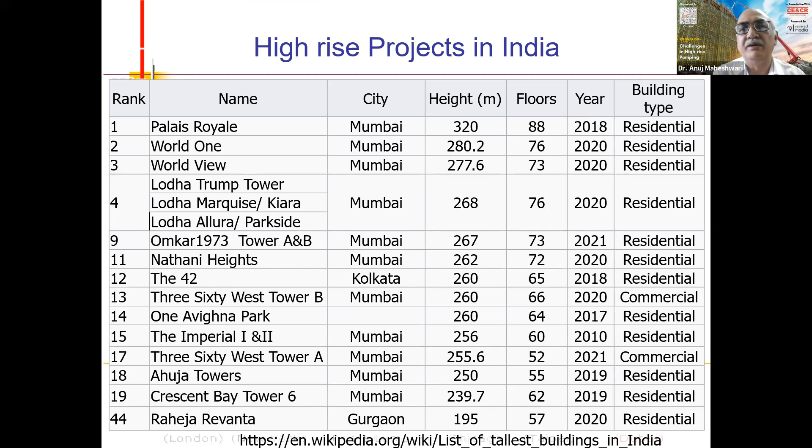Looking at that trend, I think a number of high-rise projects have started coming up in our country as well. Especially in Mumbai, a lot of projects up to 300, 320 meters are already executed - World One at 280 meters height, 76 floors, and so on.

There are also a number of projects under construction. To talk about the highest project under construction, as per Wikipedia details, it is 360 West Tower at Mumbai, 361 meters high, 90 floors. Lokhandwala Minerva at 296, 331 meters, Ocean Towers 1 and 2, and so on.

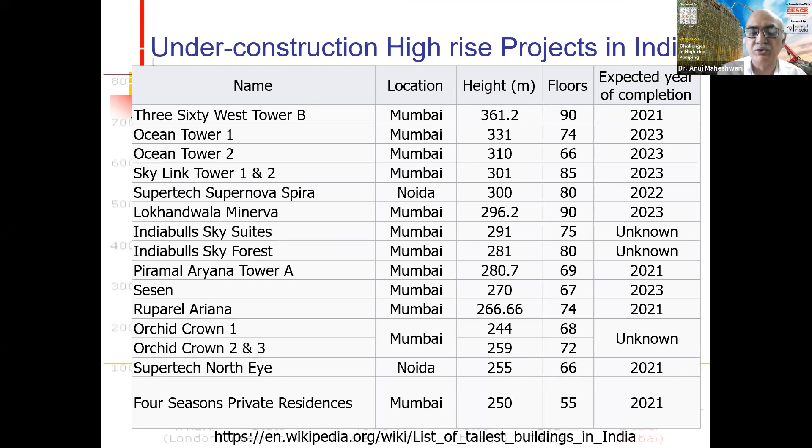So it is time that we should start understanding the concrete basics. And I'm sure if we understand concrete basics properly, handling pumpable concrete is not an issue.

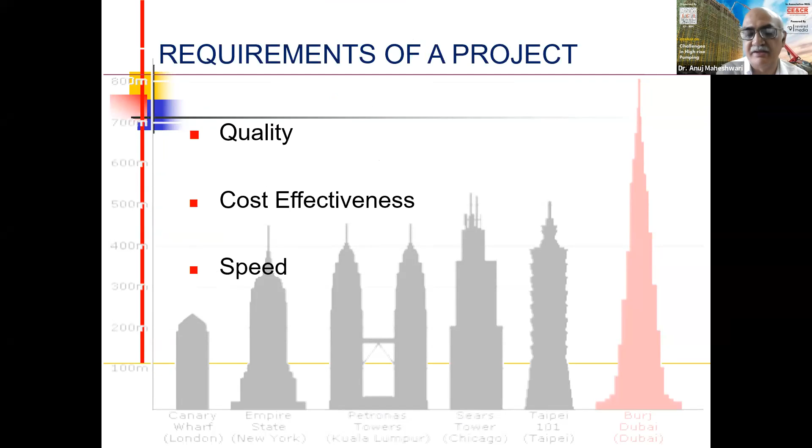As we know, quality, cost effectiveness and speed are the three main pillars that any project looks for. And if we talk about concrete pumping, it addresses all three in a very subtle way. Coming to why we need pumped concrete - some very basic assertions.

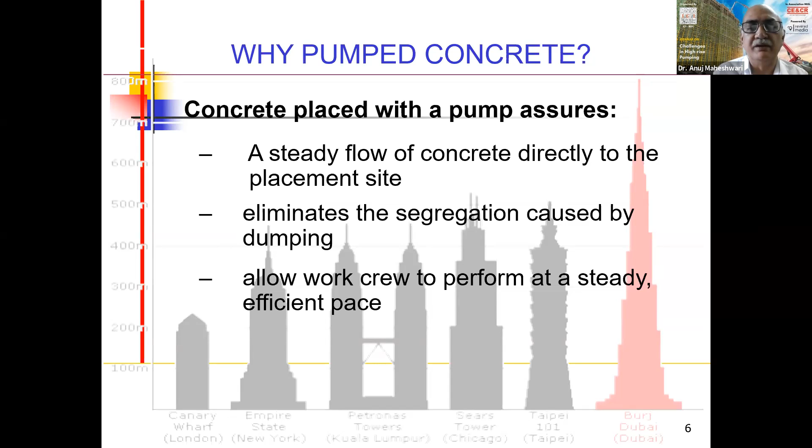Concrete placed with a pump assures a steady flow of concrete directly to the placement site, so we are not handling or rehandling it again and again. It eliminates segregation caused by dumping. It allows the workmen to perform at a steady and efficient pace - we're talking about a 30 cubic meter per hour pour, or 50 cubic meters per hour pour. So the rate of construction becomes tremendously good.

Concrete placed with pumps is economical. It reduces the unloading time of transit mixers, it reduces labor requirements at both ends of the process, and there's no need to shovel or rehandle the concrete.

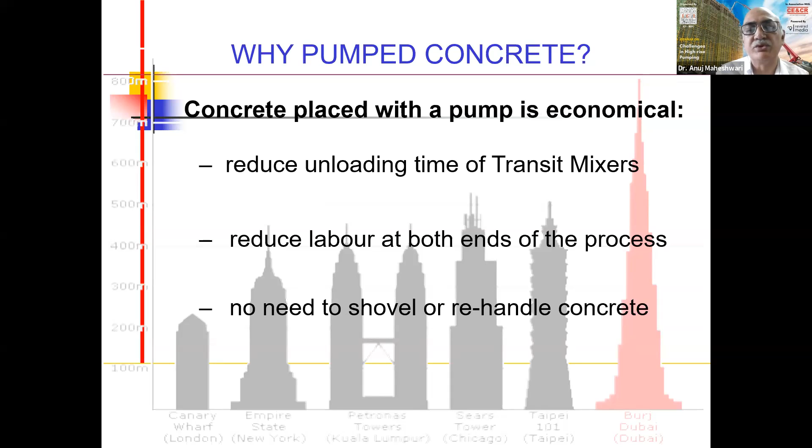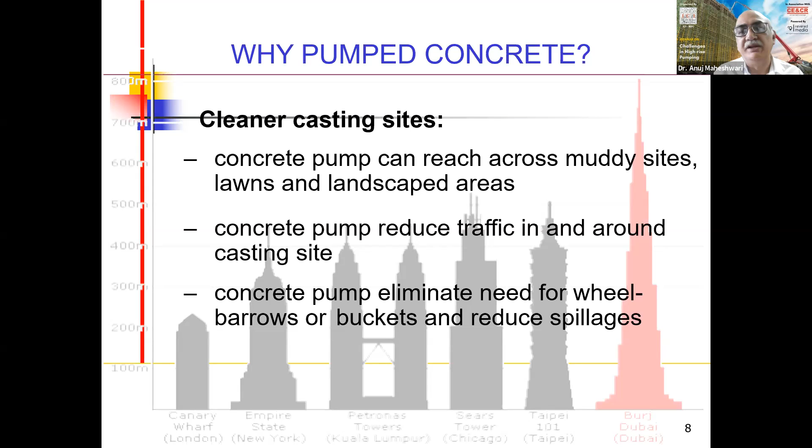We have cleaner sites - concrete pumps can reach across all sorts of landscape areas, muddy sites, lawns. If we add these up, concrete pumping is perhaps the right solution for concrete placement. It reduces traffic in and around casting sites, and eliminates the need for wheelbarrows or buckets, reducing spillages and hence wastage.

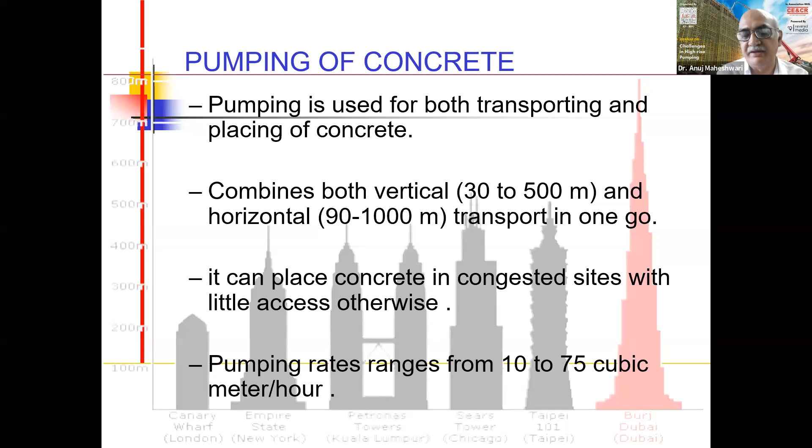Pumping is used for both transportation and placement of concrete, combining vertical placement up to 500, maybe 600 meters at one go, and horizontal placement from 90 meters to 1000 meters. In India we have successfully done over 2 kilometers of horizontal pumping as well. It can place concrete in congested sites with little access otherwise, and pumping rates range from 10 cubic meters per hour to 75 cubic meters per hour.

Coming to the types of pumps, we have different types: piston type pumps, peristaltic pumps or squeeze-crete pumps, and pneumatic placers as well.

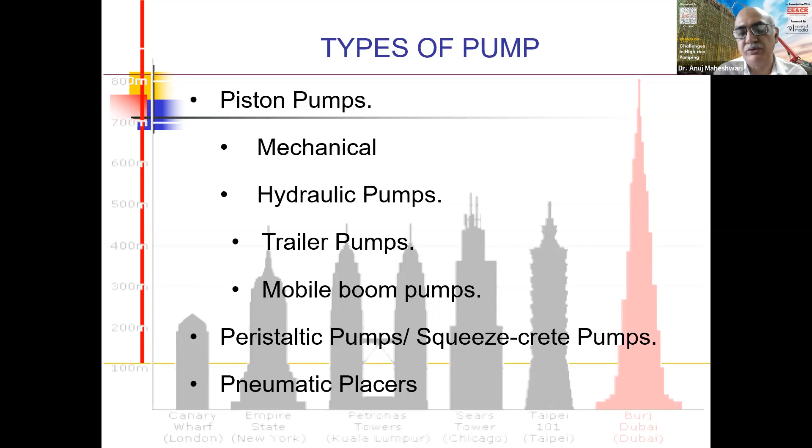Coming to piston pumps, it could be either a mechanical type pump or a hydraulic type pump. Under hydraulic, it can be a trailer mounted pump or a mobile boom pump. Let me walk you through the visuals here.

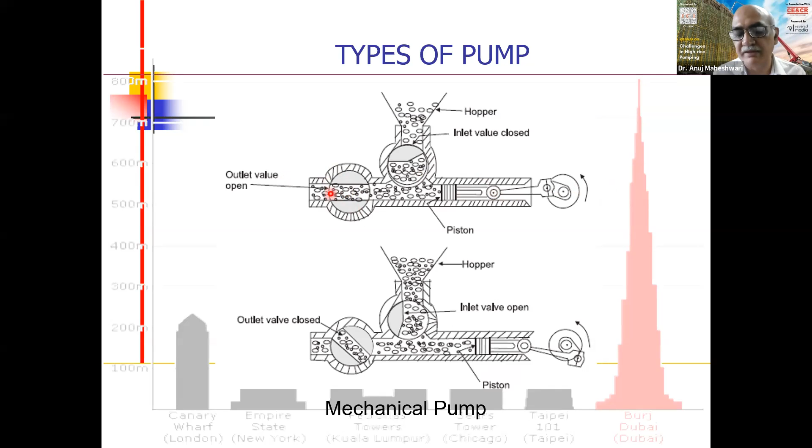This is a typical mechanical pump. We have a piston, and a hopper which is filled with concrete. We have one valve here - when this valve is open, concrete flows by gravity, by weight, into the pipeline, and the piston pushes. When the piston pushes, this gate valve is closed and the gate valve on the pipe is opened up, so the piston pushes the concrete in one stroke. It is a stroke-wise placement of concrete.

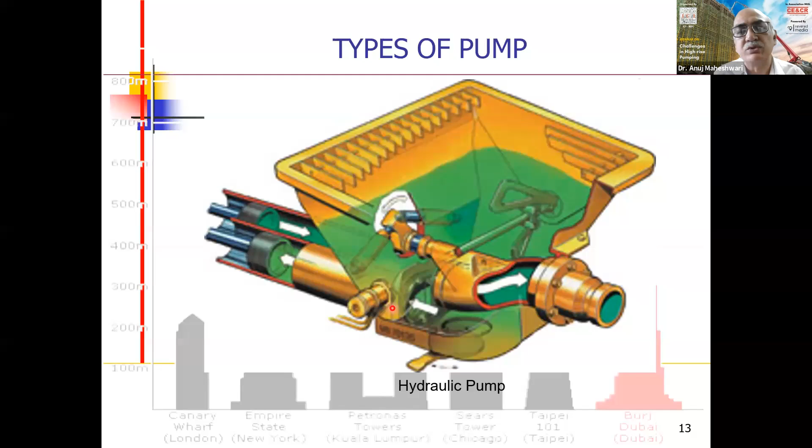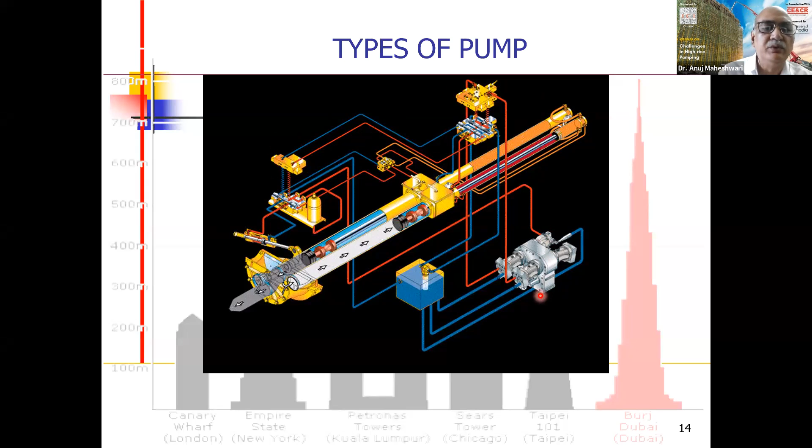Let's say clarify how the concrete is pumped here. So we have a hopper here in between, above this particular region. Concrete is sucked in, just like we suck medicine, injectable IV medicine, in a syringe. So concrete is sucked here in one operation and then pushed in another operation, and this process happens alternatively. This gate valve changes position from one pipe to another in an alternate manner with the help of the hydraulic circuit, which is provided with the pump. So this is a broad working of concrete pumps, and we can have different systems of gate valves here.

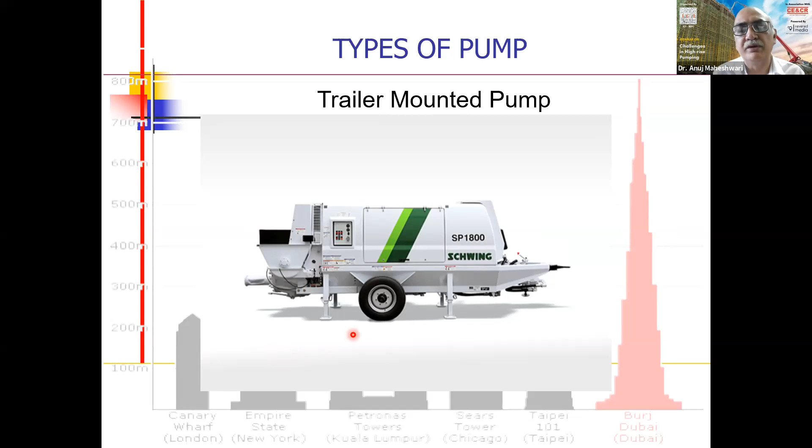This picture shows us a trailer-mounted concrete pump. Here, this concrete pump is towed away to the construction sites with the help of a towing vehicle, and we need to assemble the pipelines, which are 3 meters in size, 125 mm MS pipes, manually with the help of couplers. This takes a lot of time for mobilization of the concrete pump and pipelines at site.

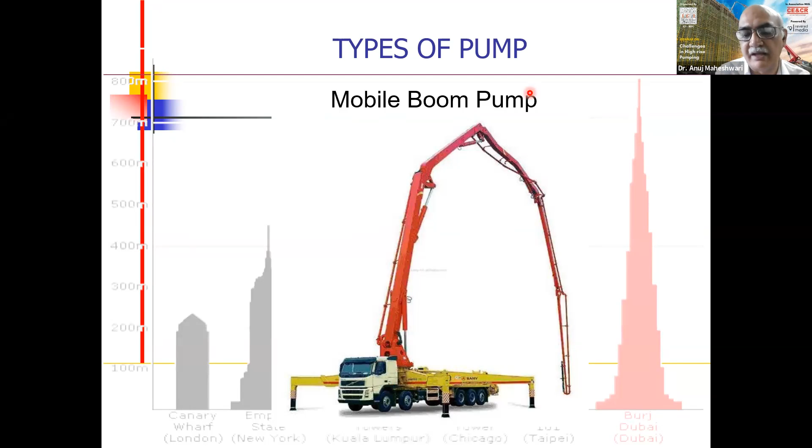Another variant is the mobile concrete boom sort of pump. Here we have this mobile foldable boom along which the pipelines are attached, and the moment this mobile concrete pump reaches site, it settles down, jacks itself up, and concrete transit mixers come and unload concrete in the hopper, and we can start pumping right away. So there is no or lesser mobilization time at site for the concrete mobile boom pumps. The only limitation is that we have a fixed length of concrete booms, so the height of concrete pumping at times becomes a limitation.

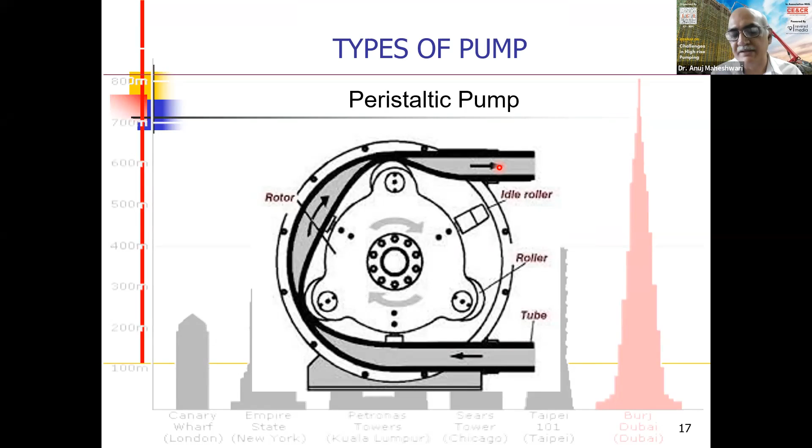Another type of pumps are the peristaltic pumps, also known as squeeze-crete pumps. Here we have a tube, a central rotor, and rollers at different configurations, along with an idler roller. The central rotor moves, and we have a tube which contains the mortar sort of material. While it rotates, it squeezes out the mortar and enables it to be pumped at the required location or position. This process is entirely similar to the way we take out toothpaste from a tube, squeezing it so the paste comes out. These pumps perform in the same process.

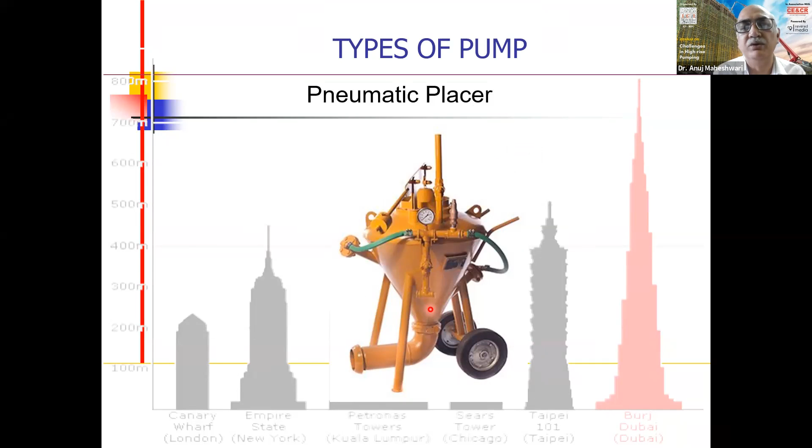Another method of placement is the pneumatic placer. This is a batch process of placement. We fill up this hopper, and then in batches, with the help of pneumatic pressure, we place concrete to the required locations.

Coming to concrete rheology, because till date concrete happens to be a material which was quite stiff and solid, a particulate material, first we look into the comparison between conventionally made concrete and present day concrete. Conventionally, we were having volumetric batching, which calls for more cement. We were doing manual placements, so lesser fines were required, and the workability was adjusted by water, handled by the concrete mixer operator visually.

In present day concrete, since we are following weight batching, we are using different supplementary cementitious materials. Hence, we have very optimized cement contents in our mixes, along with a large amount of supplementary cementitious materials. To place these concretes, we are now following mechanical placements, so we have to work with highly workable mixes, and to handle them we need higher fines. Concrete workability is adjusted by use of chemical admixtures and various other admixtures. So use of mineral admixtures and chemical admixtures are a must when we talk of present day concrete.

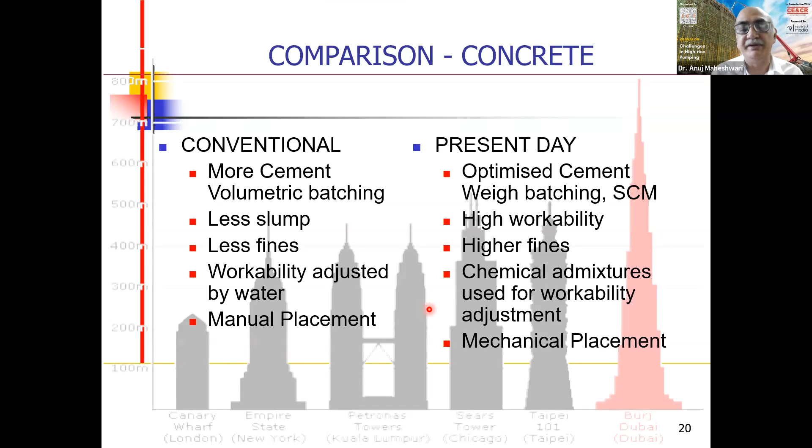And since we are talking of mechanical placement, it could be with respect to placement with the help of a crane and bucket system, or placement with respect to a concrete pump. So we are talking of high flowing concrete. Concrete now is idealized, or modeled, as a fluid, so all the laws that we have studied in our civil engineering curriculum for fluids, in fluid mechanics, apply to concrete as well. I'll not go into the physics or mathematics part of fluid mechanics, just the conceptual part.

Once we are clear with the concepts and important parameters involved while proportioning and pumping concrete, it becomes fun for a concrete engineer to work on pumpable concrete.

We know there are different types of fluids available, and the basic type is known as the Newtonian fluid. If we plot a shear stress versus shear rate graph, it is a linear relationship which passes through the origin. That means the moment we apply a little shear stress on the fluid, there is shearing in the fluid and it moves.

We have different variations. It may be either a shear thinning or shear thickening sort of fluid.

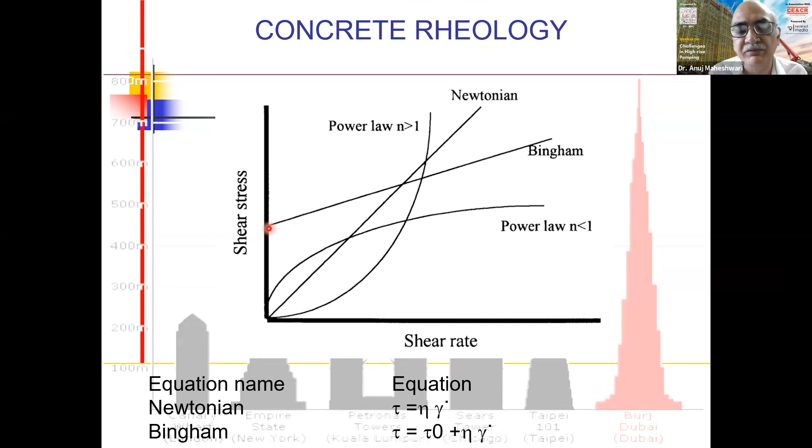It's also important to note the flow pattern. For the Newtonian fluid, we have laminar flow. The velocity profile is such that we have zero velocity at the pipeline end, it increases gradually and reaches maximum at the center of the pipeline, then reduces back to zero at the other end. This is how laminar flow takes place, basically in layers.

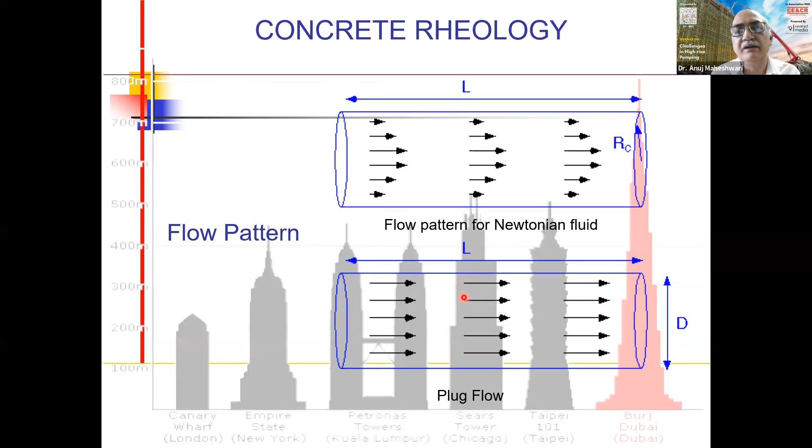There's another sort of flow called plug flow. Here, the velocity distribution remains fairly uniform across the cross section. So the velocity of a particle here, or here, or here is the same under the pressure difference that moves the fluid. At t equals 0, a particle is here; at t plus delta t, it reaches here, and similarly another particle reaches here. So there is no relative displacement between the particles when plug flow takes place.

Coming to pumpability issues, we cannot say concrete is 100% solid or 100% fluid. It is an in-between material. Concrete is also, as we know, a thixotropic material. What is thixotropic? If we leave concrete as it is, it appears to be a solid material. The moment we start applying shear stress to it or remix it, it again attains the fluid form.

We also note that since velocity is zero at the pipeline end and increases to maximum at the average velocity at which concrete is pumped, for the mass of concrete, the velocity profile remains uniform. There is no change in velocity profile like we observe under laminar flow or Newtonian fluids. There is no relative velocity between the aggregate particles for a straight pipe of constant cross section. So whatever set of particles is there at t equals 0, the same set of particles will be found at t plus delta t.

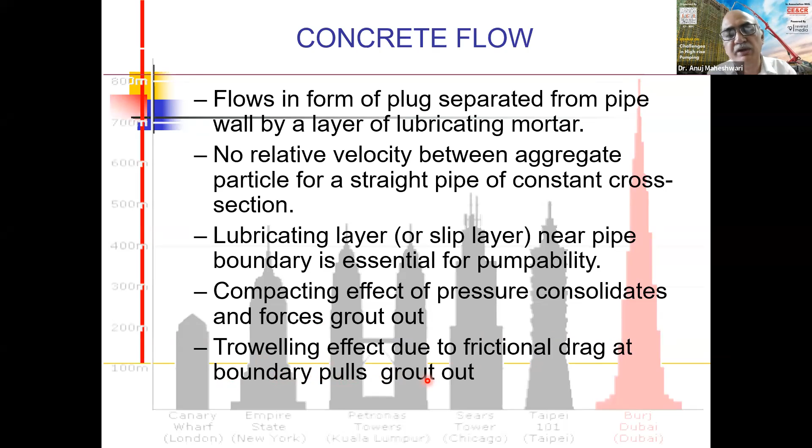Also, the troweling effect due to frictional drag at the pipeline boundary pulls the grout out. So these are the two basic mechanisms by which this mortar or grout is pushed out, and this thin lubricating layer is formed between the mass of concrete and the pipeline. This is the crux of concrete pumping. If we understand it clearly, we can design any sort of mix that can be pumped.

Also very important as a concept: concrete is a particulate material. All the constituents used in manufacturing concrete are particles basically. The coarse aggregate, 20 mm down or 10 mm down, are particles. So different gradations of particles exist. And the basic property of particles is that we have voids in between them, depending on shape, texture, size, and the size ratios we have.

These voids are very important, and they are the main heart of concrete mix design. So the whole concept of proportioning concrete is how we can reduce voids in the aggregate system, how we can reduce voids in the cementitious system, how we can design the paste when talking of high performance concrete, how much paste volume should be there. These are the basic concepts we talk about when proportioning concrete mixes.

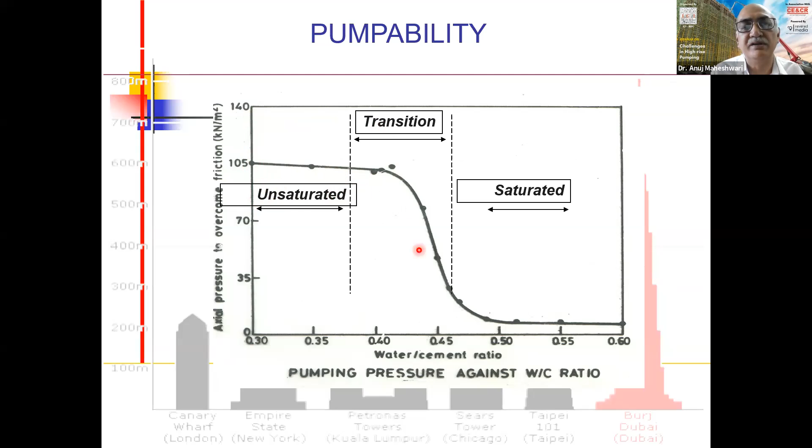So when concrete is in an unsaturated state, the frictional force is quite high and a lot of pressure is required for pumping. Perhaps concrete cannot be pumped at this stage. There's a transition stage, and when the concrete becomes saturated, this pressure drops suddenly, and concrete can be pumped very easily at much lesser pressure. You can see that around 20 kilonewtons per meter square we can pump, as against, let's say, 105 if the concrete is in the unsaturated stage up to the transition point.

So the saturation of concrete is a very important concept. Number two, when concrete is in a saturated state, the radial and axial pressures are the same. A lot of studies have concluded that the radial and axial pressures are the same, and fines content is important in this type of mix. Also, too much cohesiveness due to excess cement and fines may prevent formation of the lubricating layer.

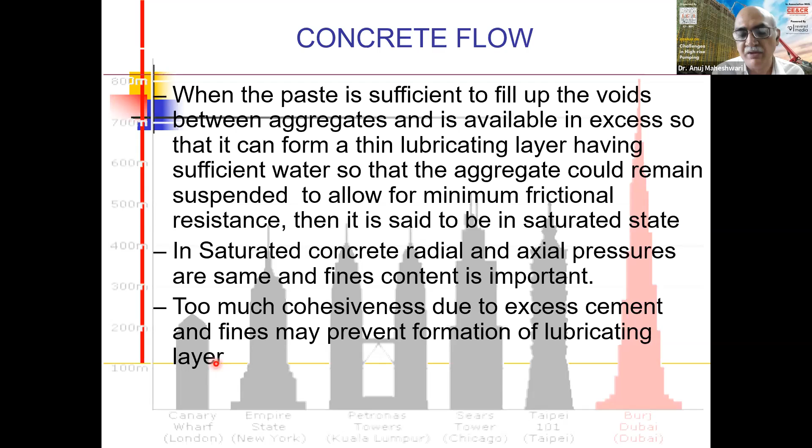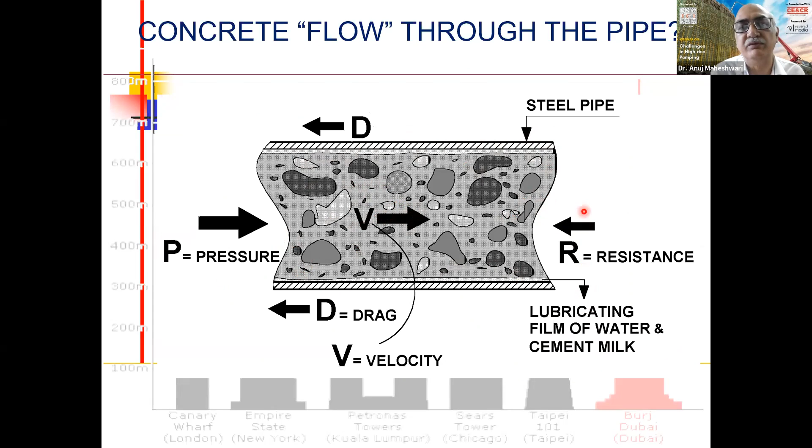What is important is that when we talk of idealization of concrete flow in the pipeline—this is a steel pipe, MS pipe—we have a thin lubricating film of water and cement milk. It is under pressure, so there is resistance from the opposite side. Concrete as a whole moves with velocity v, so we have resistance and drag forces here. This is the basic physics.

Another important concept: suppose we have a bath of water with three different specimens—one wooden, one stone, and one steel. Since the specific gravity of wood is less than that of water, the wooden specimen floats, while the other two, being heavier, drown and rest at the bottom.

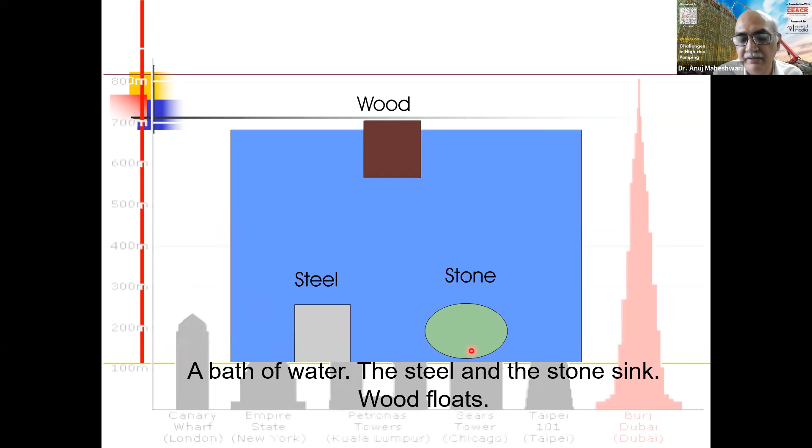Now we change the water to a thick, viscous fluid with higher specific gravity. What happens? The wooden specimen is pushed up further, and at the right specific gravity or viscosity of the fluid, the stone comes in between, while the still heavier material continues to rest at the bottom of the container.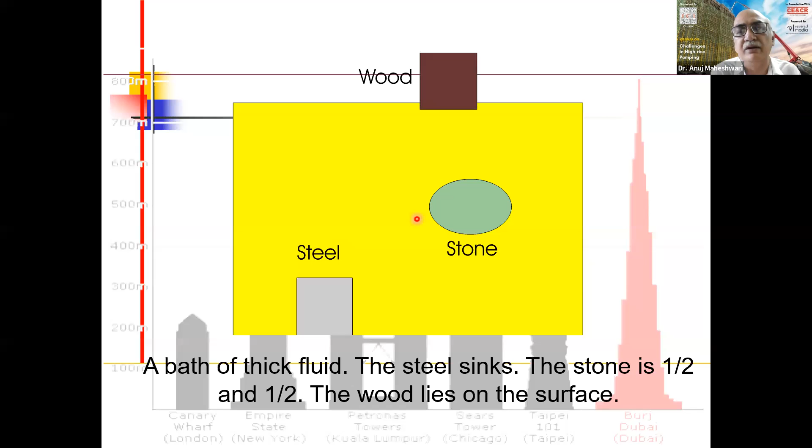This concept is important for us because this fluid represents the paste or mortar component. A right combination, a right design of mortar where we want these stones to be in a floating or suspended state, is our aim while designing the pumpable concrete mix.

As long as the mix—that is cement plus fines plus water, the paste or mortar part, which I'll define in subsequent slides—is thick enough, the stones will remain floating and can be transported.

Now imagine if we have a lot of water in our mix, defined as cement, fines, and water. If the water content is high, the mix will start segregating itself, and the moment it segregates, there will be a breach in this lubricating film of water. A right combination of cement, fines, and water is very important.

When we talk of rheology, we are talking of critical shear stress and the viscosity of the mix. This viscosity becomes important for us to understand, and we need to start analyzing our mix in terms of viscosity rather than just fines or other proportions—so it is thick enough that stones remain floating and can be transported easily under pressure differential.

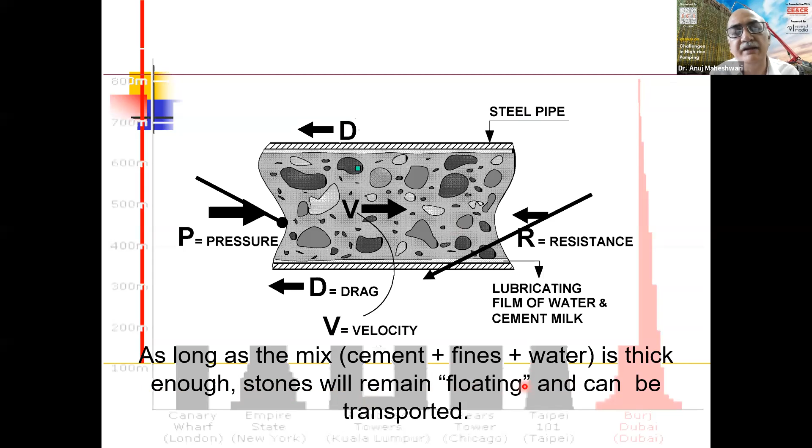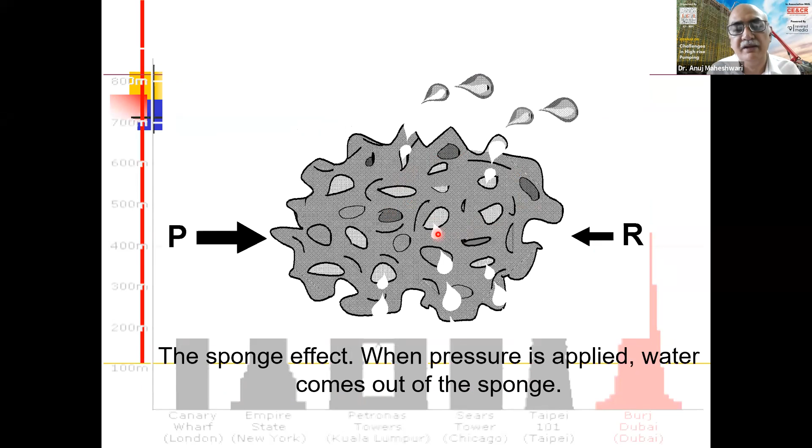Also a very important concept is the sponge effect. Consider a sponge—when we apply pressure, the excess water starts oozing out. If our concrete mix can be idealized as a sponge that is not able to retain water, then under a smaller pressure, the mixed water is forced out.

Once the water is forced out, particle interlocking starts taking place, and this thin lubricating layer breaches, allowing aggregate particles to reach the pipeline wall directly. The frictional force becomes very high, resulting in choking of the pipeline.

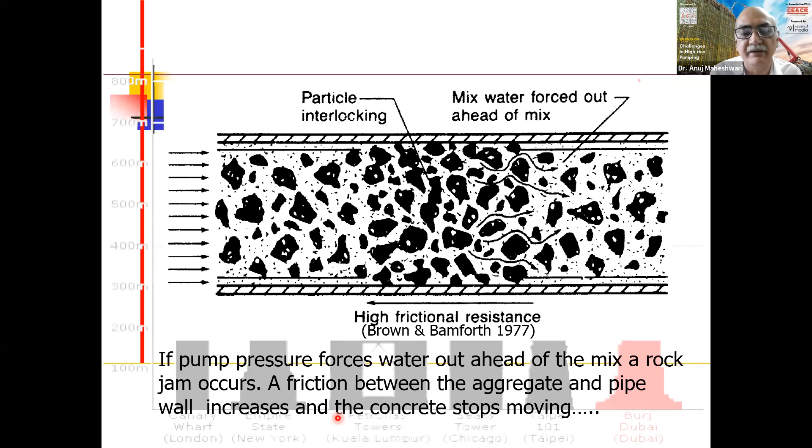If the pump pressure forces water out ahead of the mix—for whatever reason, which we'll see in subsequent slides—a rock jam occurs, friction between the aggregate and pipe wall increases, and concrete stops moving. This is when pipelines are choked or jammed, and it takes a lot of time and energy. At times, if the jam is very heavy, we cannot even clean the pipelines—we need to discard them.

So just like a sponge, we need adequate fines so that it is pushed out to the pipe walls and lubricates it up. What's being emphasized here is that the lubricating film of water and cement is important for this particular slip layer. The constituents of the slip layer are water, cement, and fine sand.

What is fine sand? We define fine sand as particles smaller than 250 micron size, or 0.25 mm.

So whatever particles in fine aggregates less than 250 microns are to be considered, along with the finer materials. This can be cement, cementitious materials, fly ash, GGBS if present in our mix. So all these constitute the lubricating layer.

If we talk about what factors this slip layer thickness depends on, whether we need smaller fines or larger fines for larger thickness, it is a function of the cement paste volume, water cement ratio, type and dosage of superplasticizer, amount of fines in sand, and of course length and diameter of the pipeline. And how thick is this lubricating layer?

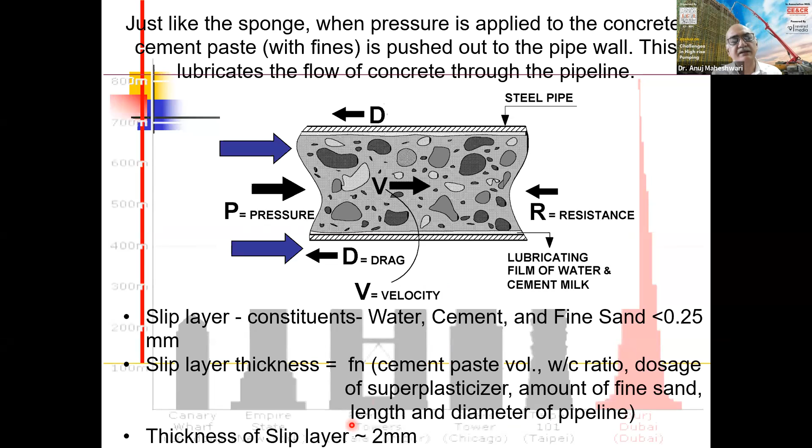Typically various research indicates that the thickness of the slip layer is around 2 millimeters or so. Irrespective of the different type of mixes being pumped, across the number of mixes analyzed, this thickness of slip layer happens to be in the range of 2 millimeters or so.

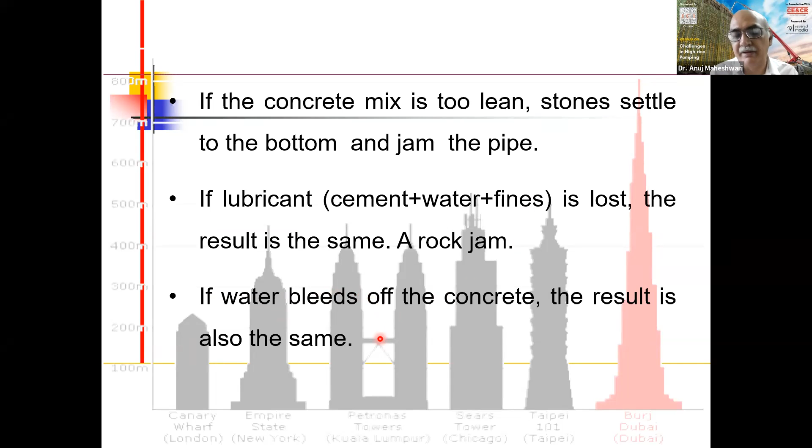If our concrete mix is too lean, stones tend to settle down to the bottom and jam the pipeline. Or if lubricant, that is cement, water, and fines, is lost somehow, it again results in a rock jam. If water bleeds off the concrete, the result is also the same. So what is very important is that we should have the right consistency, and the cohesion of the mix is very important. The mix should not segregate, the mix should not bleed. When the mix is bleeding, the concrete pipeline is bound to choke.

So these are a couple of examples which could result in the choking of pipelines.

Suppose under pressure we are pumping from this end to this end, and we have a leaking coupling or seal. What happens is that a mound is formed here, concrete starts settling down, and a collar of hard material starts building up. This reduces the cross-sectional area as well, and the lubricating layer starts being lost. The moment there is a breach in the lubricating layer, the aggregates start reaching up to the pipeline wall, and that increases the frictional force and results in the choking of the pipeline.

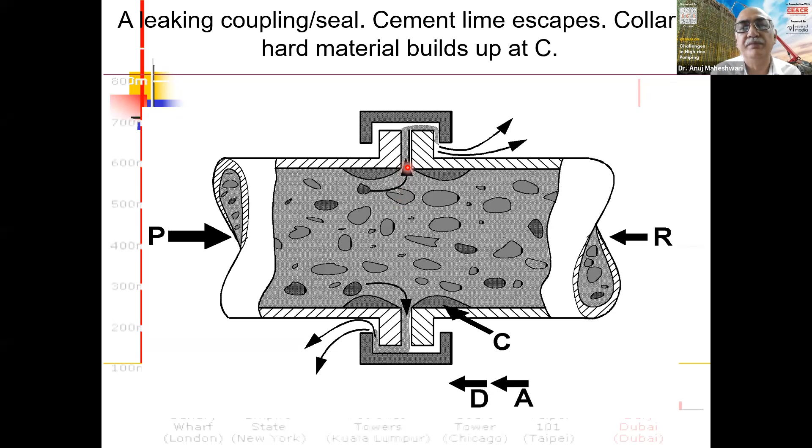So this gives us an idea of what precautions need to be taken when we are talking about how to avoid pipeline choking.

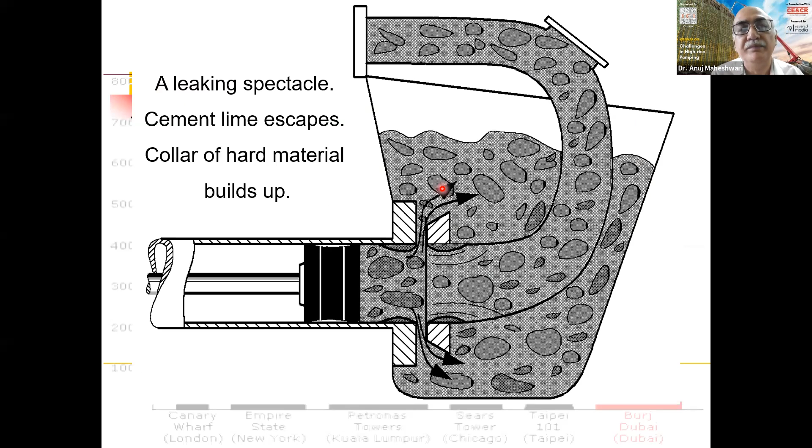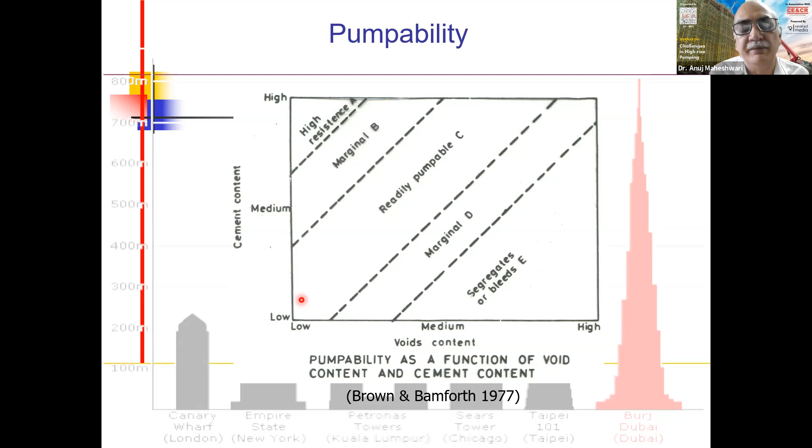So what is very important is the aggregate shape, size, and compactability, so that we have low void contents. The aggregate properties, to a very large extent, govern the pumpability of the mix. And perhaps at a lower slump as well, we can pump the concrete mix if we have lower void contents. So let's see the different aspects in subsequent slides.

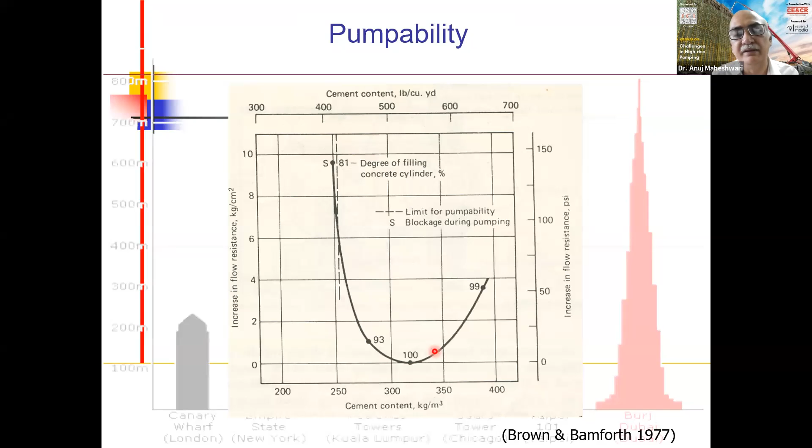So what is important, again, there is an optimum. If we have a very lesser cement content or binder content, the flow resistance, the friction resistance, is bound to be very high. If we have excess of fines, then also the flow resistance is going to be sufficiently high. So for a good pumpable mix, we need to have robustness in the mix. We need to design our concrete mix around this region so it can have a good margin of variation that can be absorbed with variation in the raw material properties.

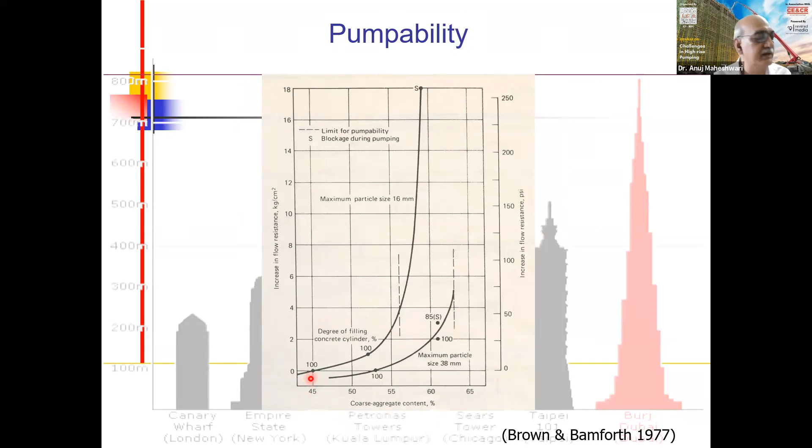Now coming to the recent studies - there was almost a lull from, let's say, the 70s, 80s to 2003 or 2005. In between, not much work had been done on the pumping of concrete, but from 2003 to 2005 onwards, a lot of work has been undertaken by various researchers world over. The main areas of recent research are the method of measuring the rheological property of the slip layer, not of the concrete itself. We are talking about the slip layer because this happens to be the critical factor for pumping of concrete, and developing a fundamental model for pumping prediction using these rheological properties.

Conducting all these experiments physically takes a lot of time, energy, and resources. So if we can develop some fundamental modeling, we can develop mathematical models and predict the pumping pressures and how much reduction in flow resistance we can achieve with different types of mixes, and also the factors influencing the pumpability of concrete. These are the areas where research is happening. Just to give you all a flavor...

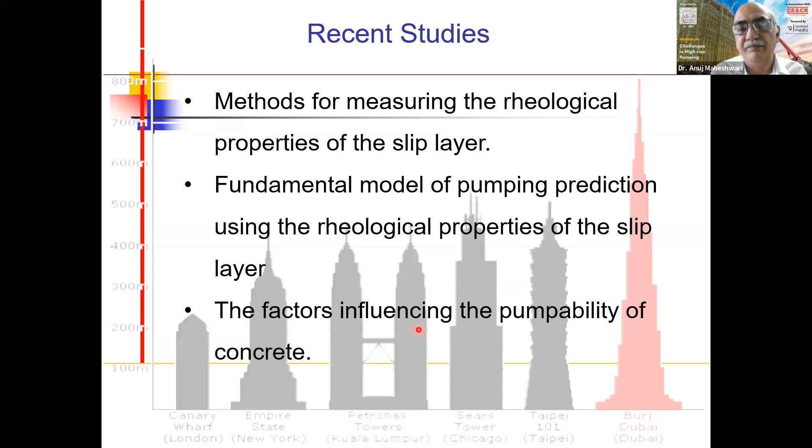The recent studies are focusing on four areas, four concepts, you can say. One school of thought is doing research considering the frictional force in the slip layer is constant regardless of the pumping pressure or velocity. So Sakuta et al. in 1989 and Lipovetski in 1963 started considering this concept, and they developed their research in this area.

Another school of thought considers the frictional force in the slip layer is linearly proportional to the flow rate of pumping. So Weber in 1968, Morinaga in 1973, Browne and Bamforth in 1977, they propounded this particular school of thought. Another school of thought considered the frictional force in the slip layer increases linearly proportional to the normal stress applied on the piping walls.

These researchers happen to be from this school of thought. And the last school of thought considers the frictional force in the slip layer is affected by both the flow rate and the normal stress applied on the piping walls. So Tanigawa et al. in 1991 started with this particular concept.

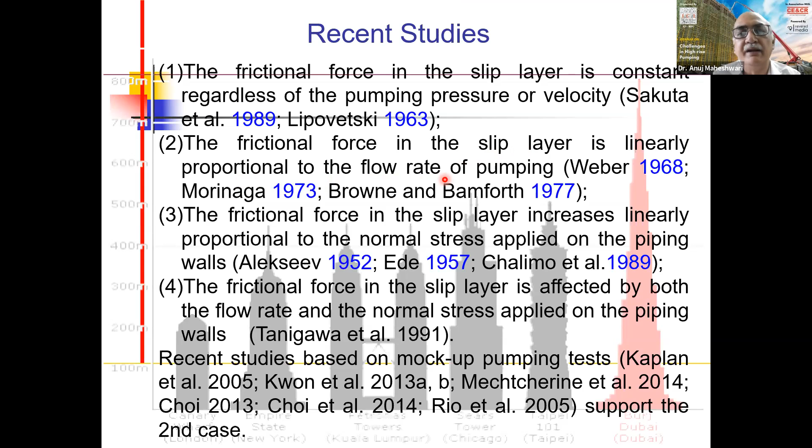And the recent studies based on the mock-up pumping tests done by Kaplan et al. in 2005, Kwon et al. in 2013, Choi in 2013, Choi et al. in 2014, Rio et al. in 2005, support the second case where the frictional force in the slip layer is considered linearly proportional to the flow rate of pumping. So a lot of things are happening, and it is my interest to keep a tab on all this research and keep updating my knowledge and keep sharing with you all.

Coming to the effects of pumping on concrete, if the pipeline length is quite long, or the pumping height is high, then we can expect a drier consistency. In normal pumping this doesn't hold perceptibly, but yes, this happens. We can expect an increase in temperature as well because of the quality of the thin lubricating layer in between. If we have a good lubricating layer, this impact would be much lesser. If the frictional resistance is much higher, the increase in temperature would be much higher.

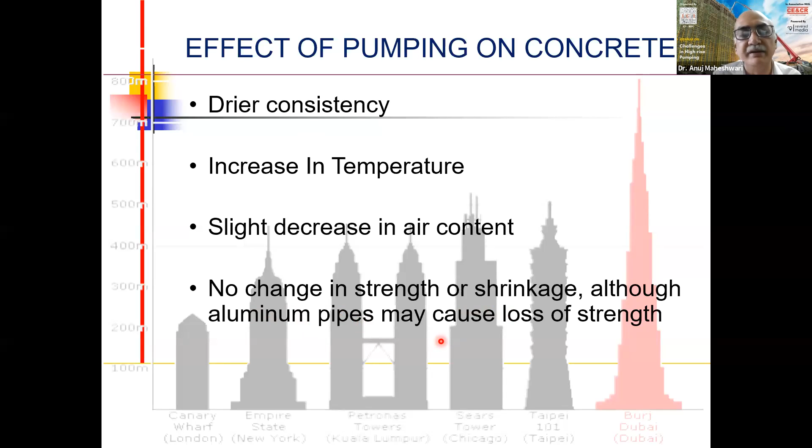Slight decrease in air content if we are designing mixtures with air, and if we are pumping for a long range horizontally or vertically, then we have to perhaps over-design for the air content as well. No change in strength or shrinkage, although if we are having aluminum pipes—we mostly have mild steel pipes—aluminum reacts with the alkalis in cement.

So that could result in a little reduction or loss of strength, otherwise no. Coming to high-rise pumping, the topic of the day, because these concepts are very important for us to understand and appreciate, then it's fun dealing with the mix design for the concrete. So the following aspects should be taken into consideration for planning high-rise concrete pumping.

Very important is the overall plan of the project. Right from the planning stage, we need to have a discussion with the project people. What is the layout of the project, how we are planning to transport different raw materials, how we are planning to transport concrete, how we are planning to place concrete, whether we are going to use a stationary type of pump, whether we are going to have a self-climbing boom type arrangement for the project, whether we are going to have skip buckets type of system for placing concrete or for transporting other raw materials. So proper involvement of the concrete supplier, vendor, right at the planning stage of the project will greatly simplify much of the hassles later on.

Right type of concrete mix design. So you need to give sufficient time. You need to spell out your specification, your requirements for the project—how much time, what is the grade, what type of pouring that you are looking for, whether you're looking for pumped concrete simply, or whether you're going to have self-compacting concrete—because the moment the workability of concrete increases, all sorts of challenges increase for the concrete technologist who designs or handles the concrete mix.

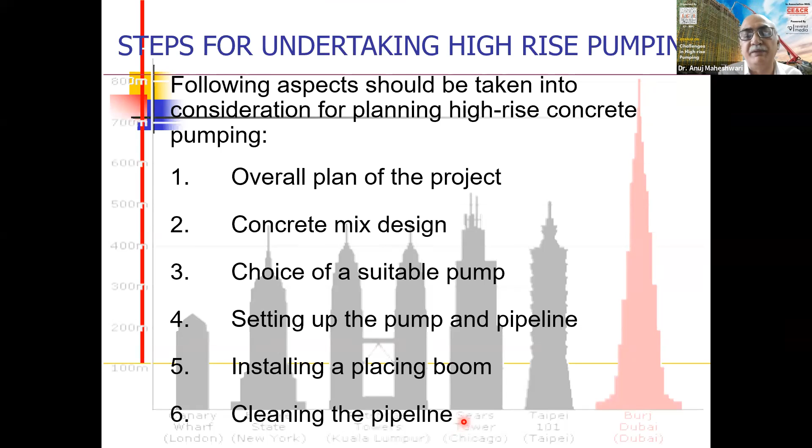For such type of projects, we have a very small margin of error. We cannot afford a single choking in the pipeline. So all the planning should be very diligent and very precise.

With all due credit, I have taken this image from information available in the public domain for the project named Sky Forest at Mumbai. Height of the building was around 280 odd meters, with 3 basements, 16 parkings, 2 clubhouses, 1 transfer floor, and around 50 residential, refuge, or services floors.

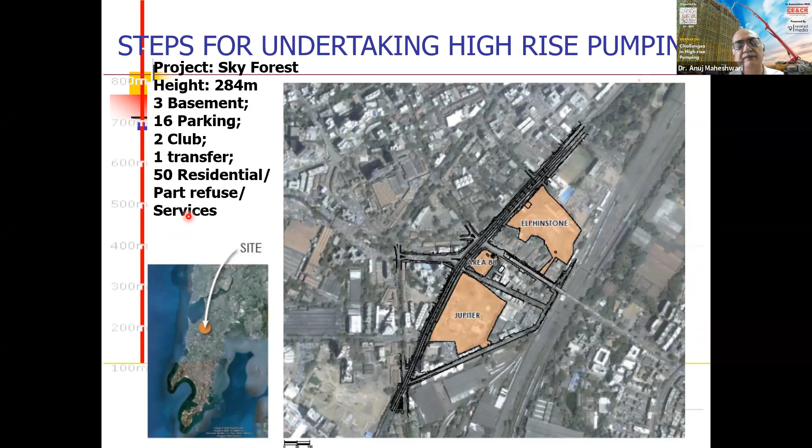Google Map and the location of the project here. What is important on the plan is that we need to plan where we are going to install different types of machinery, where we are going to place our concrete pump. Based on the area available, where we can put our transit mixers, our concrete pumps, our tower cranes, and our placer booms - these are the locations where the placer booms are installed - so that we can cover all the area we have to cater for while executing our projects.

So installation of pump location is very important - whether the location is accessible, whether we are planning any storage space for other materials there, or other storage requirements. All these things are very important at the planning stage.

So the overall plan of the project is very important. We need to fix up all these things - how we are going to fix the pipelines.

Proper clamping of pipelines is very important, because a slight differential movement might induce stresses on the couplings and the gaskets. So we should be placing the pipeline at locations where we are in a position to change the pipes if needed.

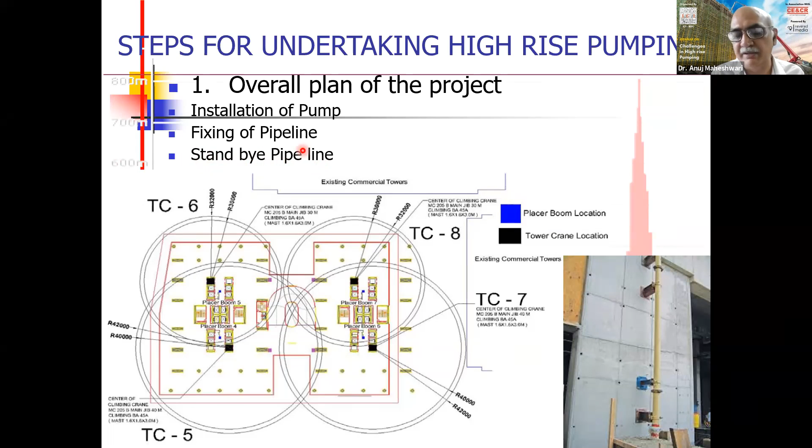We should have planning for the standby pipeline. Suppose during pumping some untoward choking takes place, we should immediately switch over to the standby pipeline and complete the concreting operations. Concrete mix design - I'm a concrete technologist, so I'll devote a little more time here.

Concrete mix design always happens to be a challenge when we are talking of high-rise construction. When we are talking of high-rise buildings, we are invariably talking of high-grade or high-performance concrete. The challenge with high-performance concrete is the low water binder ratio, which implies either working with very low water content or high binder content. That means maintaining the consistency of the mix is a challenge.

Here, the selection of the right admixture - high range water reducing admixtures, and the right type of workability retention molecules or retarders - are very important. Slump retention is the most important criteria when we are talking of low water binder ratio concrete.

When we are talking of high-rise concrete, we are talking of higher concrete heads. In addition to the normal pressure, we have the pressure of the concrete column as well, so we should take that into account when finalizing the right machine for pumping.

There could be a specification for the E value of concrete. When we talk of E value of concrete, we are talking about the minimum paste content, because it is the coarse aggregate that governs the E value of the concrete - a slightly lesser E value will have a huge impact on the displacements in the buildings. We also often have a specification for shrinkage and creep of the concrete, which again we need to keep in mind while designing our concrete mix.

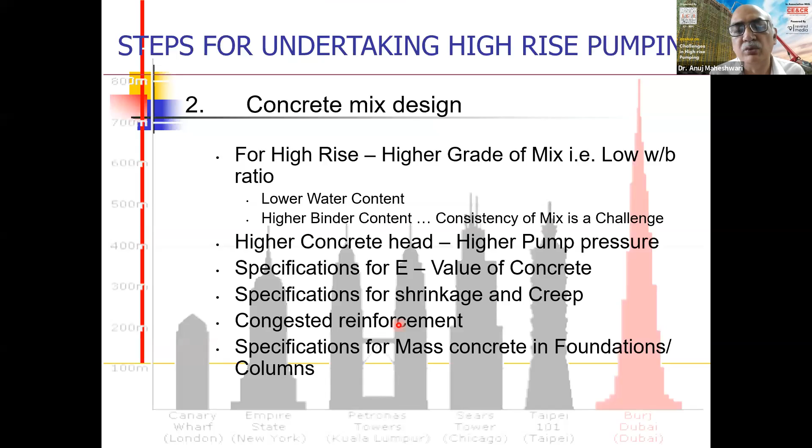Let me give you an idea about the impact of different materials on the concrete mix, tabulated here. When we talk of cement content, analyzing this in terms of rheology rather than slump or flow, we consider critical shear stress and viscosity. Viscosity is a very important parameter when designing the mix. With higher cement content, we expect a decrease in yield stress and an increase in plastic viscosity.

When we increase the water content, that results in a decrease in the yield stress and also a decrease in the plastic viscosity.

When we talk of aggregates, when the aggregate volume fraction is increased, the yield stress increases and the plastic viscosity also increases. When the sand to aggregate ratio increases, there's an optimum value we have to determine, both for yield stress and plastic viscosity.

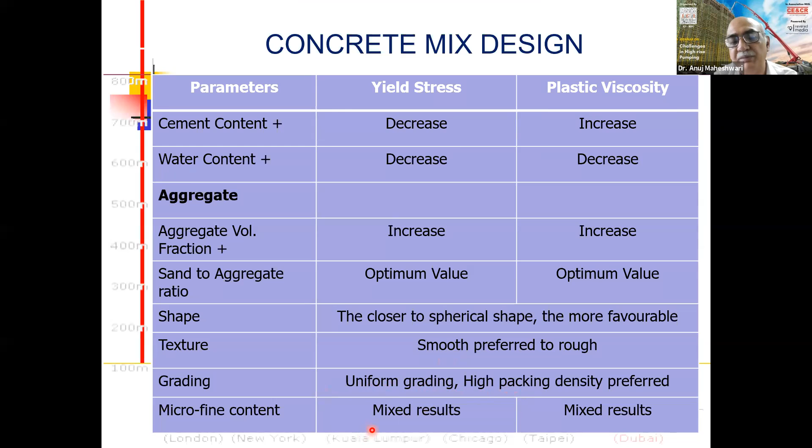Talking about texture, smooth texture is preferred compared to rough. We should have uniform grading, where higher packing density is preferred. When we talk of microfine contents, we have mixed results for both yield stress and plastic viscosity.

Coming to admixtures, use of a superplasticizer decreases the yield stress, with mixed impact on plastic viscosity. Air entraining agents have a mixed impact on yield stress, whereas plastic viscosity is decreased. Viscosity modifying agents increase both yield stress and plastic viscosity.

Similarly, supplementary cementitious materials: fly ash decreases yield stress, whereas impact on viscosity is mixed depending on dosage. Silica fume, at low dosage, decreases the impact on yield stress and plastic viscosity when the dosage is less than 5%.

Silica fume at higher dosage, say 8%, 10% onwards, increases yield stress and plastic viscosity. GGBS has a mixed impact on yield stress and increases plastic viscosity. Fiber reinforcement increases both yield stress and plastic viscosity.

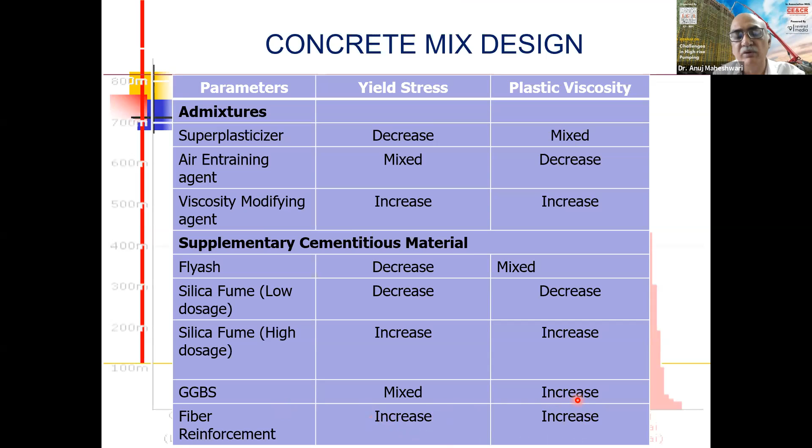These rheological properties and the impact of different materials give a qualitative idea of how to approach the mix. Fine tuning is always needed while doing the mix design and trial mixes.

Coming to pump selection, we have this nomograph available with all pump vendors, where our starting point is the output rate we are anticipating, say from 10, 20, 30, 40 up to 110 cubic meters per hour, and the diameter of the pipeline we are installing for our project. Based on this and the pipeline diameter, we proceed with the selection.

Then coming to the slump of the concrete, say 12 centimeters, 8.5 centimeters, 6 centimeters, we determine the exact slump we propose to maintain for our mixes. Then we come to the length of the pipeline - for this example, starting from 50 meters up to 200 meters, 600 meters, 2000 meters. So the length of the pipeline increases in this fashion.

So we arrive at what pressure is needed, and then we have to account for high-rise conveying, adding 1 bar per 4 meter height - so 20 bar for 80 meters conveying height. We add this up and arrive at the power requirement for the engine of the concrete pump. That is how we design and select our concrete pump machinery.

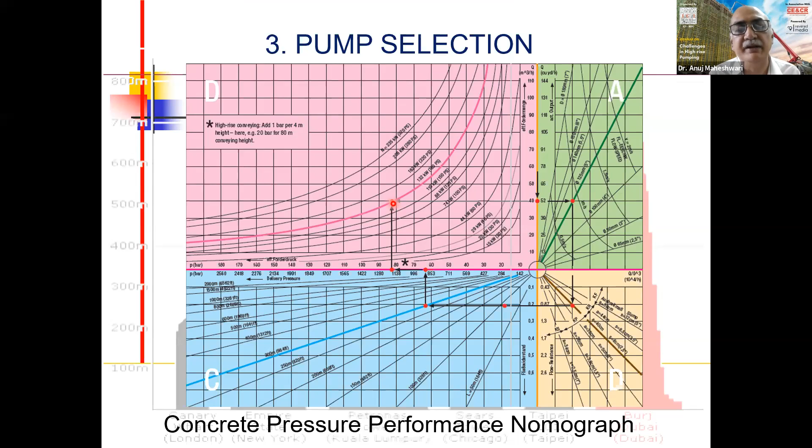Then how to install and where to install - once we have planned, we have to install the placing boom at the right time, and have the right layout of pipeline as well as the right fixtures for the pipeline.

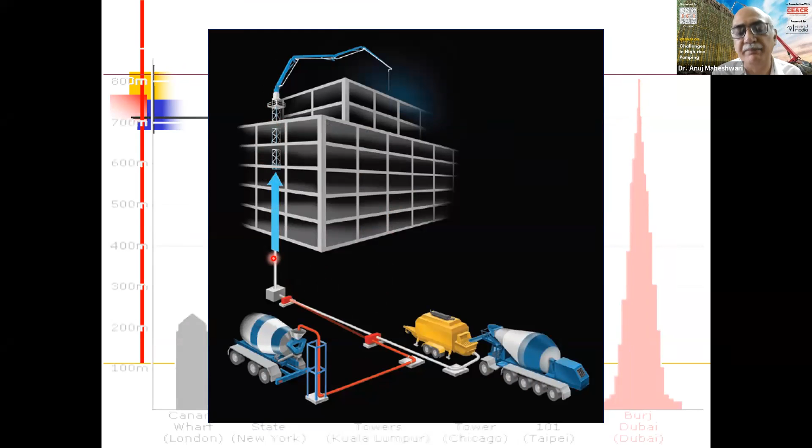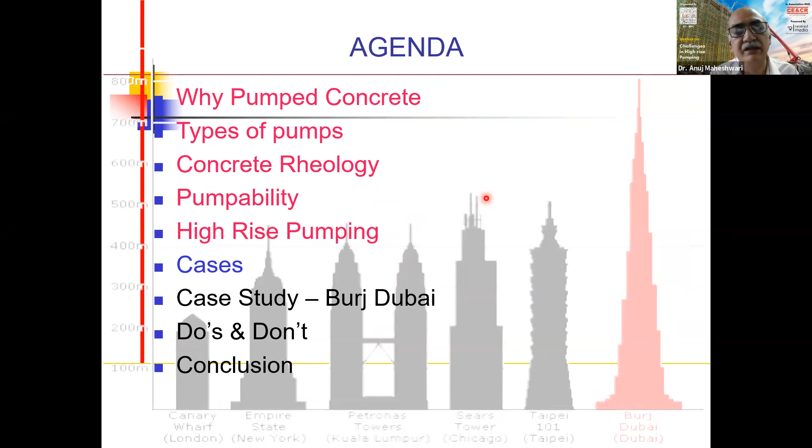Coming to a couple of cases, I'm at 526. I'll just read it out. This case is for the Post Office Tower at Frankfurt, Germany, done in 1977. Maximum height pumped was 310 meters. Piston diameter was 130 mm. Piston stroke was 2100 mm.

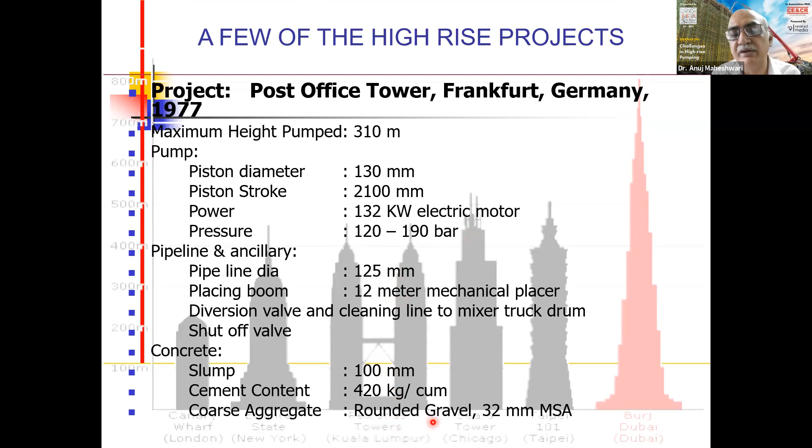A 132 kilowatt electric motor pump was selected with 120 to 190 bar pressure. Pipeline diameter was 125 millimeters. Placing boom was 12 meters mechanical placer. Concrete design was for 100 mm slump with 420 kgs of cement content per cubic meter. They used rounded gravels, 32 mm maximum size of aggregates. Another project, Riva del Garda Power Station, Italy, done in 1994.

Maximum height pumped was 532 meters. Piston diameter was 150 mm, piston stroke 2100 millimeters, 200 kilowatt electric motor, 160 bar pressure. Output was 15 cubic meters per hour. Pipeline was 100 mm pipe diameter. Slump used was 200 millimeters with cement content of 420 kgs per cubic meter. They used crushed rocks with 16 mm maximum size of aggregate. They used natural sand as fine aggregate and also microsilica in their mix.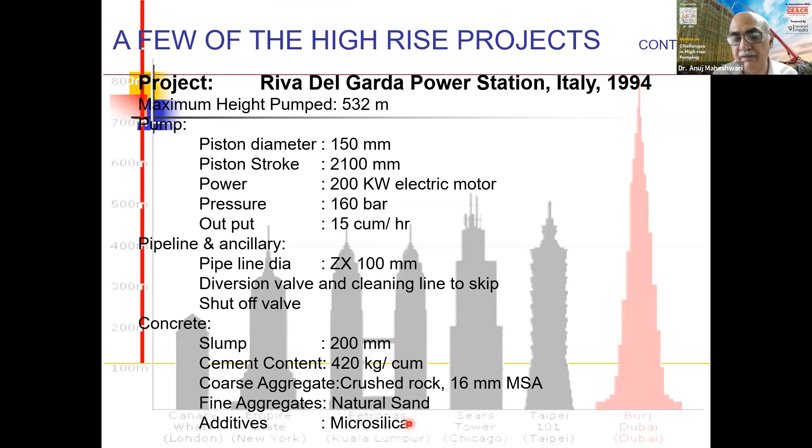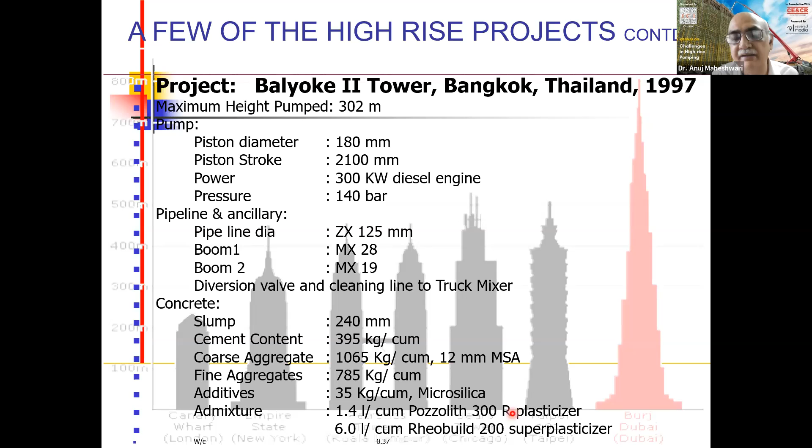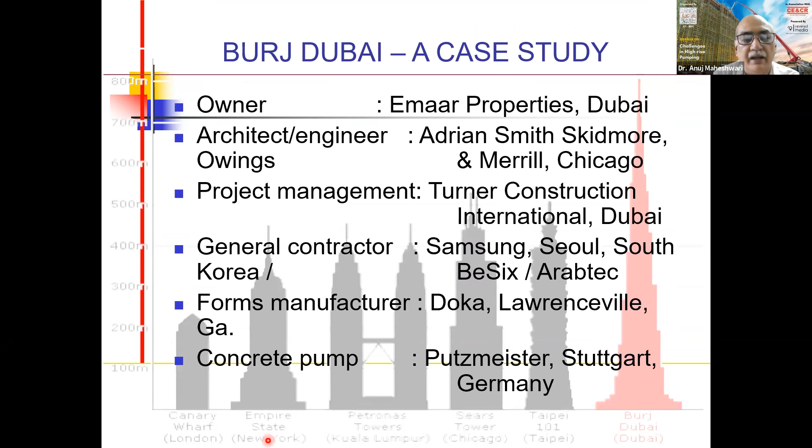Coming to the case study of Burj Dubai, very quickly. The owners were Emaar Properties, Dubai. Architect engineers were Adrian Smith, Skidmore, and Merrill of Chicago. Project management was done by Turner Construction International, Dubai. General contractors were Samsung South Korea, BeSix, and Arabtec. Form manufacturers were Doka, Lawrenceville. And concrete pump used was Putzmeister, Germany.

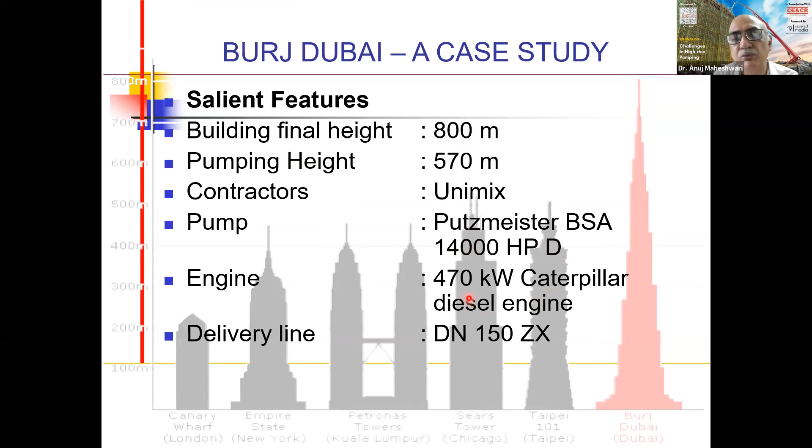Building's final height was 800 meters, while the pumping height was 570 meters. Ready-mix concrete contractors were Unimix. Pump used was a 14,000 Putzmeister HP diesel engine driven, with engine power of 470 kilowatts, Caterpillar diesel engine, and pipeline diameter was 150 mm.

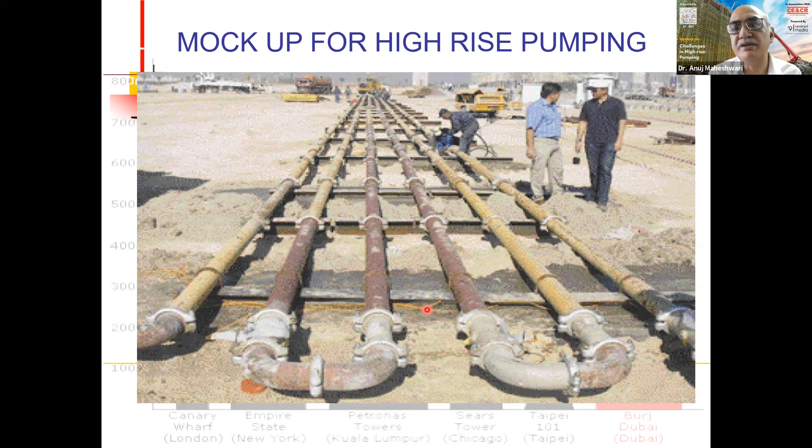So they simulated a mock-up of the equivalent height of 570 meters pumping by arranging a horizontal pipeline of equivalent length and bends. Once it successfully pumped, they proceeded. What is very important is the clamping of the pipeline, because there is huge pressure from the pump side. If the pipelines are not secured properly, if the pumps are not level, there would be differential forces impacting the various joints.

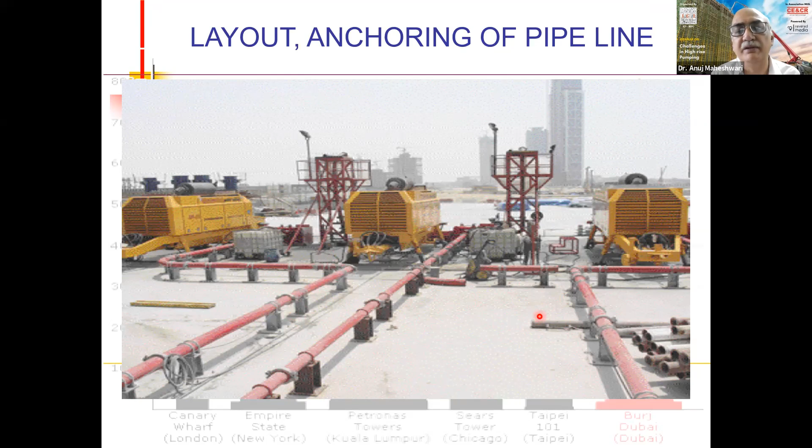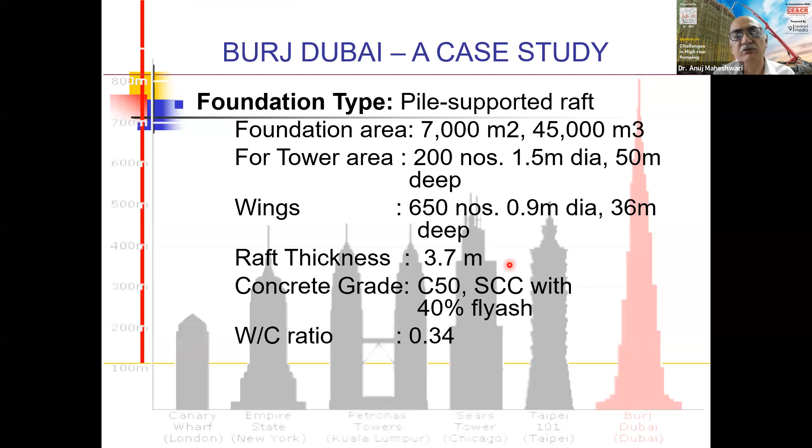So definitely it was a temperature-controlled mass concrete foundation. Concrete used was grade C50 self-compacting concrete with 40% fly ash, with water cementitious ratio of 0.34. For the superstructure, for initial pumping pressure up to 200 bars, they had a grade of concrete of 80 megapascals. Flow was 600 mm mix flow.

They used 13% fly ash mixed with 10% silica fume with 20 mm maximum size of aggregate. For higher floors, the grade of concrete happened to be 80 MPa, but the design mix was changed for the higher floors. They used 20% fly ash with silica fume and 14 mm maximum size of aggregate.

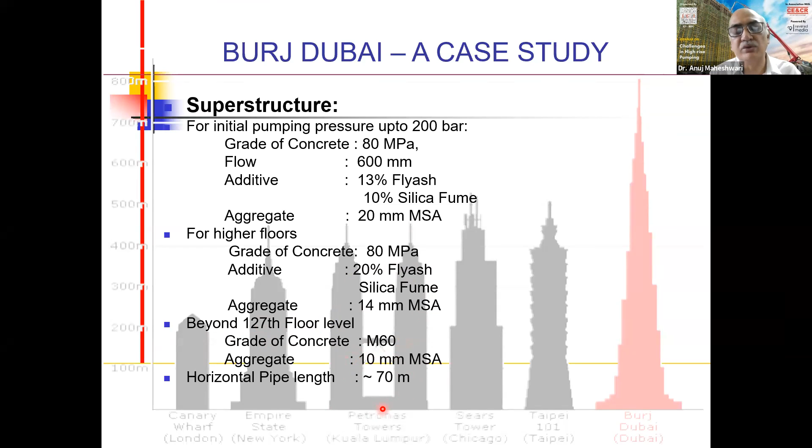Beyond the 127th floor level, the grade of concrete was M60, maximum size of aggregate used was 10 mm, and the horizontal pipeline length was 70 meters. This is very important - we need sufficient horizontal pipe to counter the weight of the concrete in the vertical pipes.

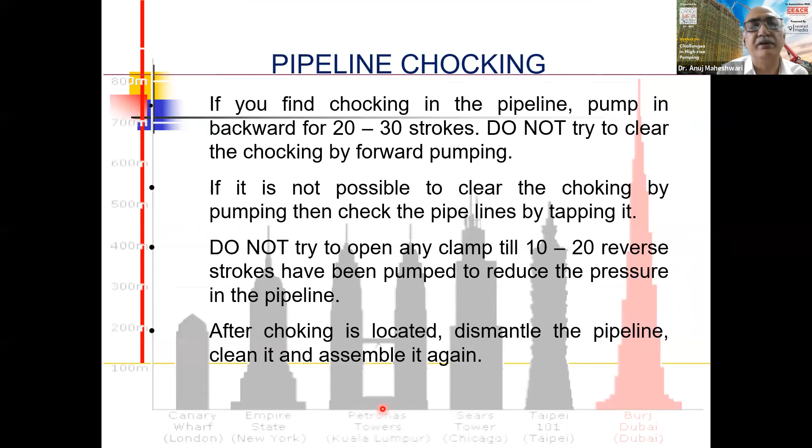I'll skip the do's and don'ts, just summarize because we are already at 5:32. In conclusion, pumped concrete should fulfill the following criteria: it should have a flowing consistency, that is adequate slump in the range of minimum 120 plus minus 20 mm for normal pumping operations, or flow of 600 millimeters or higher for high-rise pumping.

The concrete should be cohesive and non-segregating, non-bleeding. Aggregates used should be angular, should not be flaky or elongated, and should be well graded, so as to minimize voids in the aggregate system. The concrete should have sufficient fines - particles finer than 250 microns. For example, there should be a minimum of 450 kgs per cubic meter of fines for a 20 mm maximum size aggregate mix.

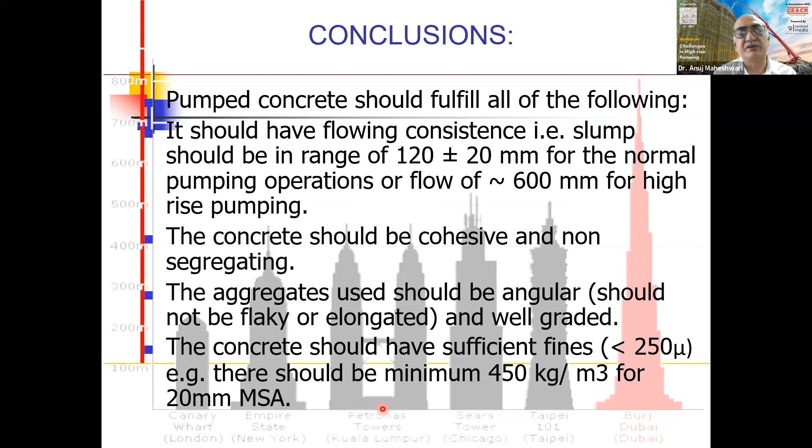So I conclude my presentation here, and we'll go for the question and answer session. I'll stop sharing.

Thank you, Dr. Maheshwari, it was an excellent presentation. Actually, in Delhi now, even CPWD is constructing multi-storied buildings. So the issue of pumping of concrete and frequent choking of the pipelines, and then having to clean the pipelines and fix it again - this is a problem all the engineers, at least in CPWD, are facing, because now we are going for buildings which are even 30-storied in Delhi. Earlier, buildings were only 4 to 6 story, 8-storied, and pumping was quite easy. So this is a very pertinent topic and a very pertinent presentation.